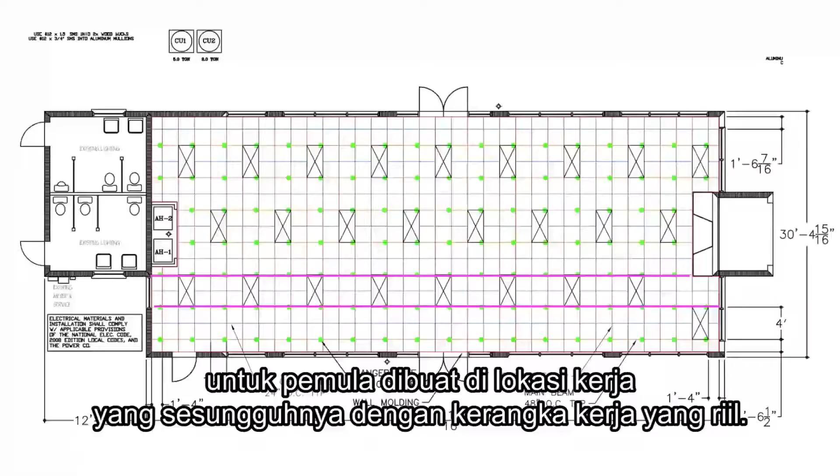Would you like to learn how to install an acoustical ceiling for that next commercial project or even your home's basement? Armstrong's authentic 20-minute ceiling apprentice video was filmed on a real job site with real blueprints. We will review the tools that you need, plus how to determine critical installation layouts. Next, you will learn proper wall angle, hanger wire, and grid installation techniques that will have you hanging like a pro. Your installation will look so good, and no one will ever know you're a 20-minute apprentice.

After that, we will discuss lighting layout considerations, ceiling panel installation techniques, and helpful grid accessories from Armstrong that will make your installation look even that much better.

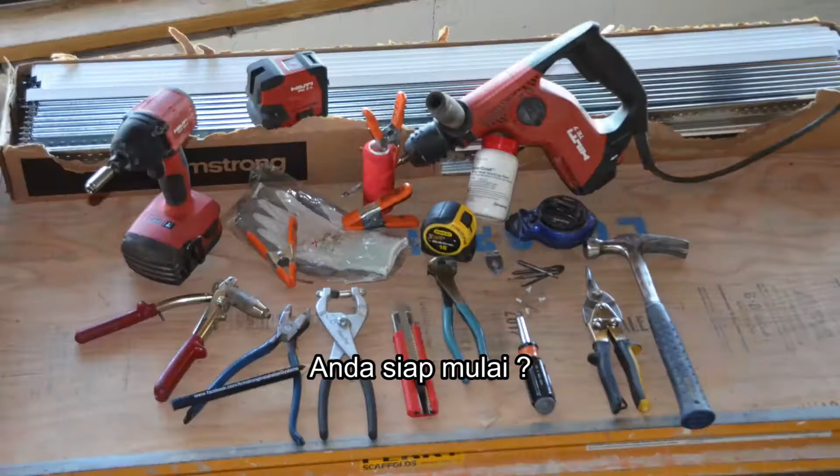Ready to get started? First, you will need some tools. Here are the most common tools that you will need. Pause and screenshot this checklist. You will see these tools identified and put to use throughout this video. Having the right tools and safety equipment will help to ensure a perfect, safe ceiling installation.

Here are the project plans. This was an old open-air camp dining hall that is being enclosed and air-conditioned for more versatile use in the warm Florida climate. Our new ceilings will quiet the space while providing consistent, even lighting throughout.

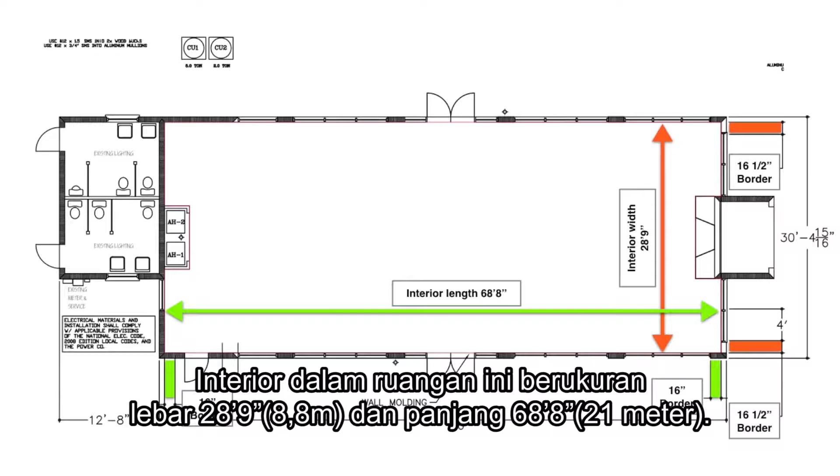The interior width of this room is 28 feet 9 inches, while the interior length of the room is 68 feet 8 inches. This video will show how to center up your ceiling installation within a room for a pleasing, balanced visual. The architect may have grid layout recommendations in their plans, like main runners lined up at center of column, mullions, etc. This is important to check before your installation.

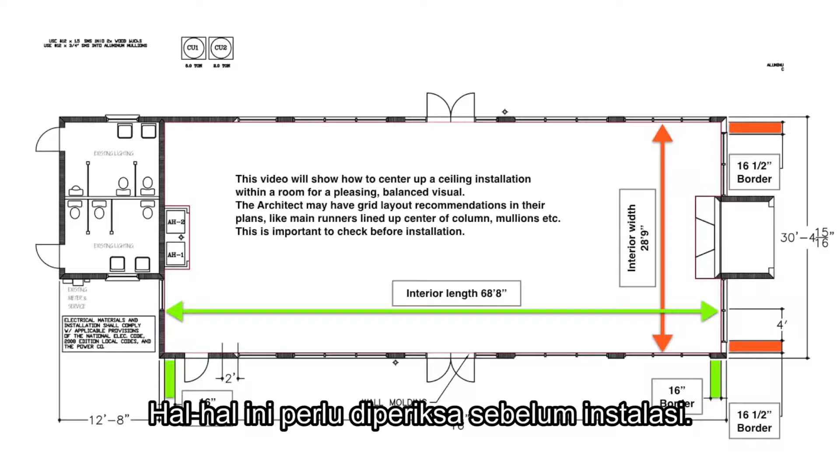A laser is crucial to use when installing today's level ceilings. Luckily, they can be purchased inexpensively from your home center or distributor. Many locations rent lasers as well. Make sure your level line laser is set to the finished height of your ceiling. This is the line that we will hang our wall angle at first.

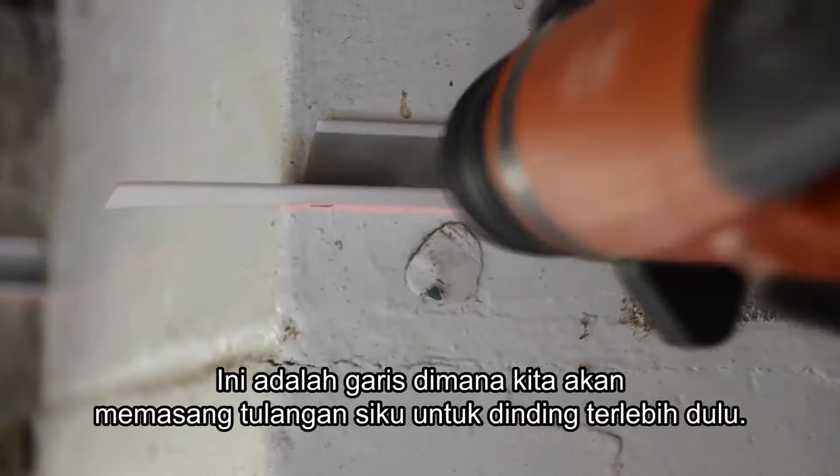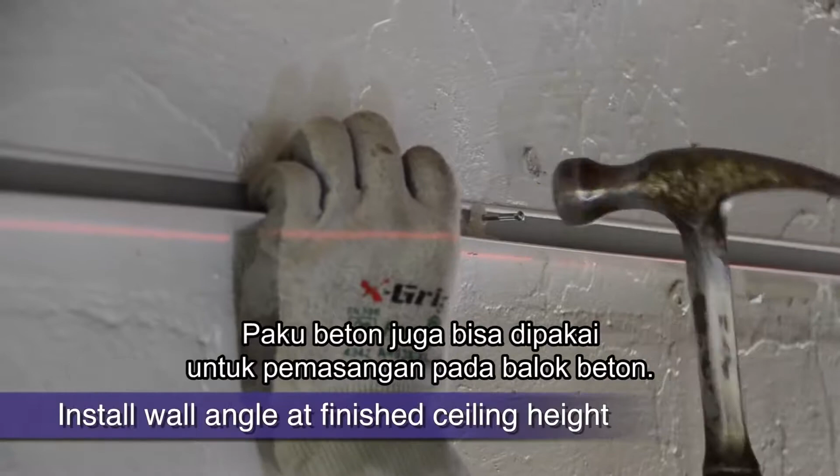As you can see, on this project we must hammer drill holes for tap-in anchors as we hang our wall angle to the red laser line. Hard nails often work as well when attaching to concrete block. Most often, you will only be attaching to drywall. In that case, a screw gun and drywall screws or fence staples and a hammer are all that you will need to attach your wall angle to drywall. Code does not consider acoustical wall angle structural, however, it must be securely attached to the wall for a finished installation.

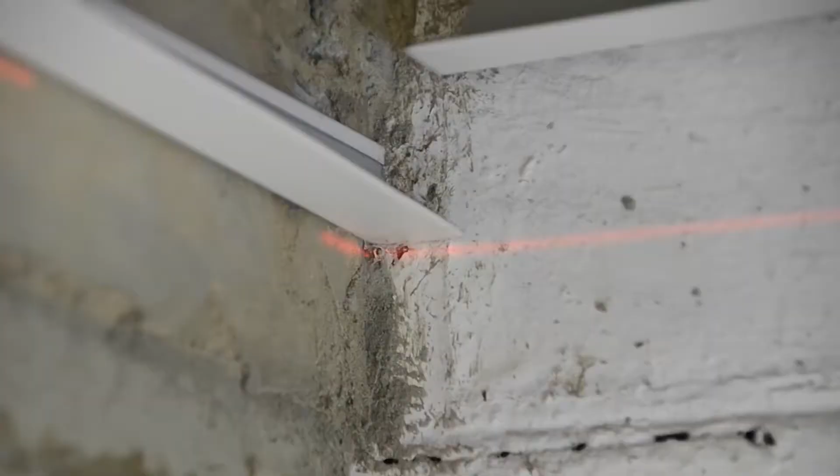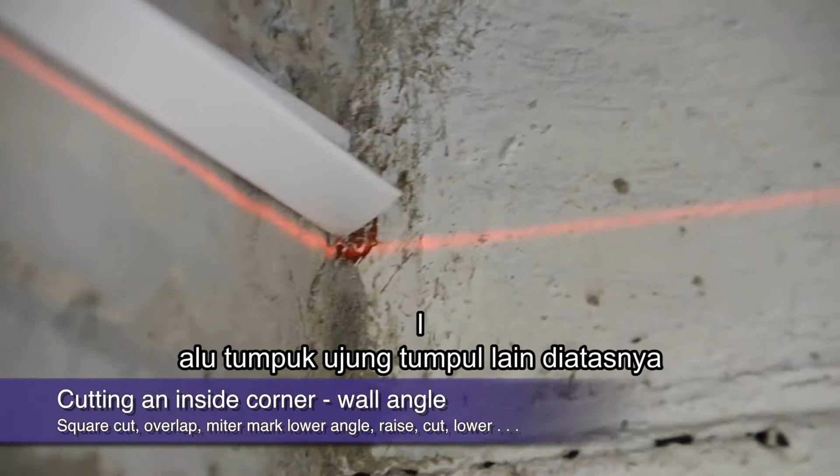When you get to your inside corners, a finished 45-degree miter is a much more pleasing visual than simply overlaying butt cuts. All you have to do is mark and cut a 45-degree on the lower angle, then overlay the butt cut upper angle for a perfect mitered visual from below.

Your outside corners require a little more attention, but are still easy to achieve a clean mitered visual. Simply let the angle override past the corner, then square butt cut to length. Next, you want to cut away the vertical flange, leaving an exposed horizontal tab. You will do this to both angles that approach the outside corner.

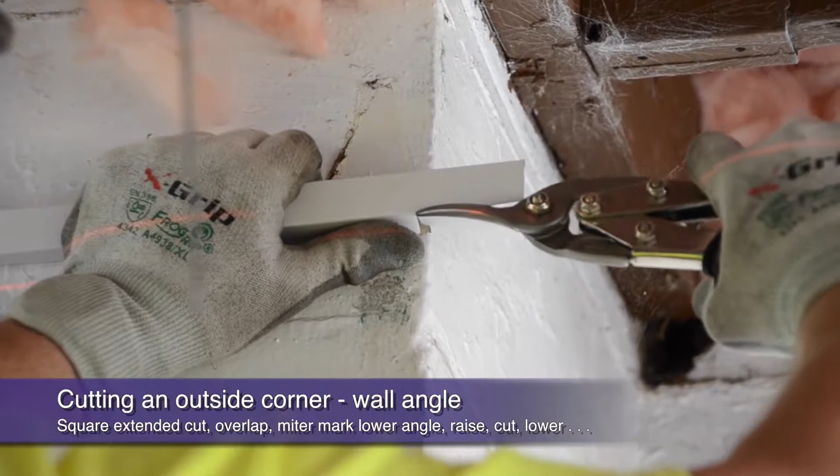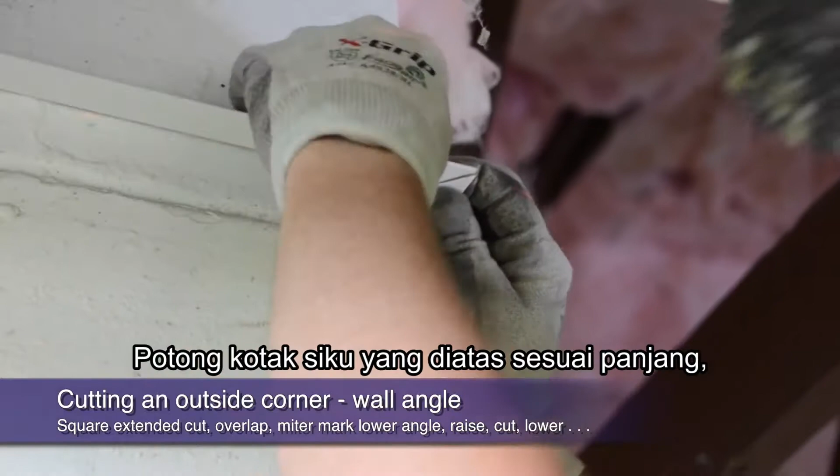After overlaying them at the corner, mark where your 45-degree miter cut will occur on the lower angle. Next, raise your upper angle and make the 45-degree cut on the lower angle only. Square cut your upper angle to length and you're finished with a corner that looks perfectly mitered but is still structurally sound. A spring clamp will hold the corner into place while you do the final attachment to the wall.

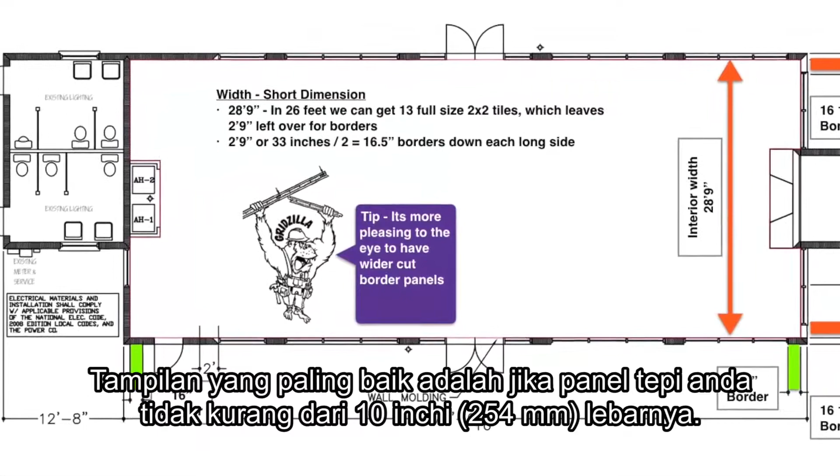Now, let's figure out what width our perimeter border ceiling panels should be. This will help us determine our ultimate grid layout. Since buildings are not usually perfectly square, you know that you're going to have some border cut panels. The most pleasing visual is achieved when your border panels are no less than 10 inches wide and the opposite wall has the exact same size border panel, achieving proper room balance.

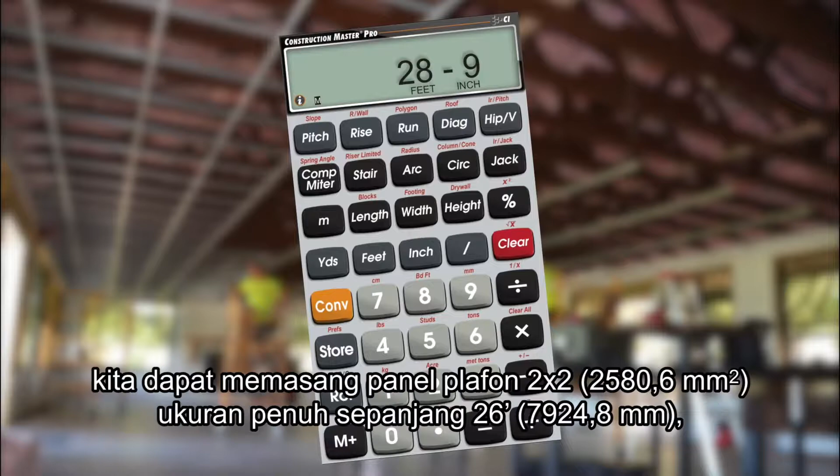We're going to use the handy Construction Master Pro calculator app, but a regular calculator will work as well. If our room is 28 feet 9 inches wide, let's figure on installing 26 feet of full-size 2x2 ceiling panels. That leaves 2 feet 9 inches of panels for our borders, which when divided by 2 leaves us with 1 foot 4.5 inches, or 16.5 inch border panels down each side.

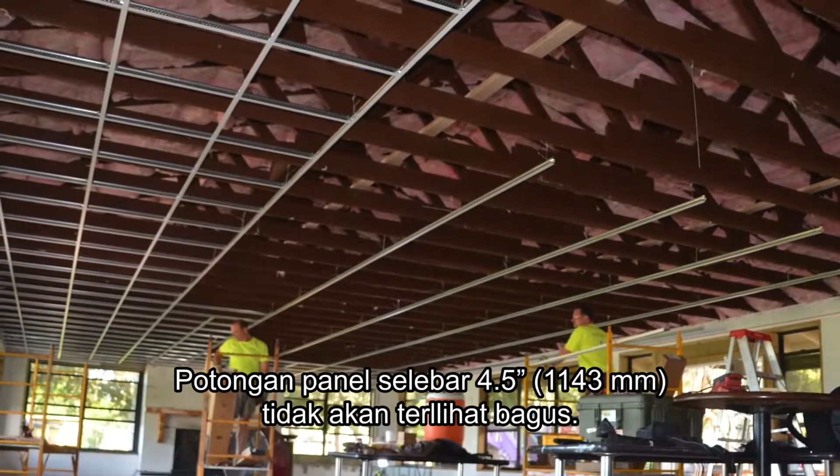Small sliver 4.5 inch border panels would not look good, but these 16.5 inch border panels will look great and achieve proper room balance. Now, let's figure our borders for the remaining 2 sides. If the length of our room is 68 feet 8 inches, let's use 66 of that total for our full-size panels and split the difference between our remaining 2 feet 8 inches.

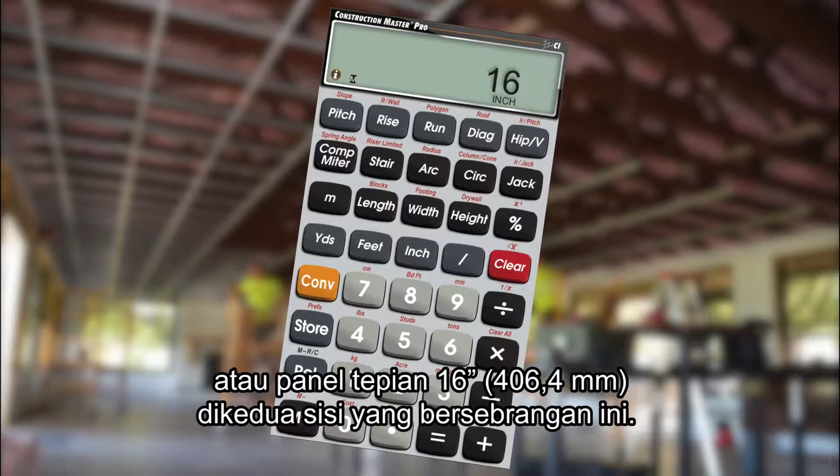Divided by 2, that leaves us 1 foot 4, or 16 inch border panels down these other 2 opposing sides. To ensure that our grid installation is nice and square, it's important to install 2 perpendicular dry line or control line strings to serve as a perfectly square benchmark to install our grid off of.

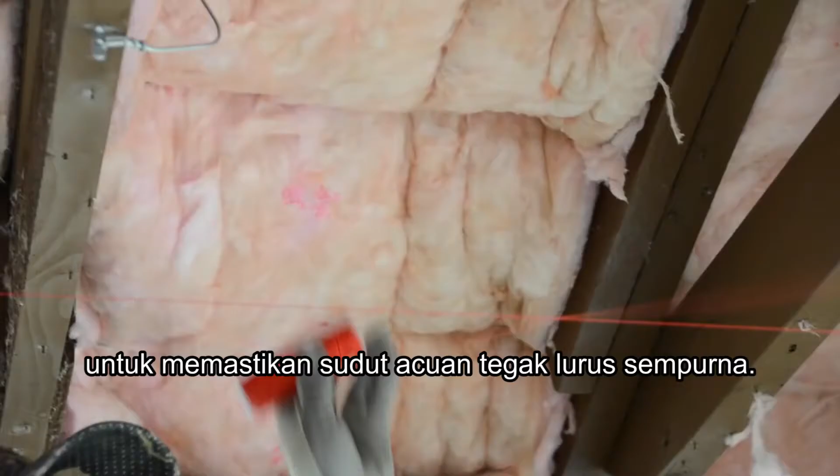We will run our first dry line down the length of the building. We already know that the border panels here will be 16.5 inches. Let's add 24 for the width of a full-size panel. This will be 40.5 inches, and place our dry line dead center, running parallel with our first main runner. We really need that dry line to be just touching the outside edge of this main runner. So after adding a 1/2 inch for a 15/16 inch main runner, this places our dry line at 41 inches

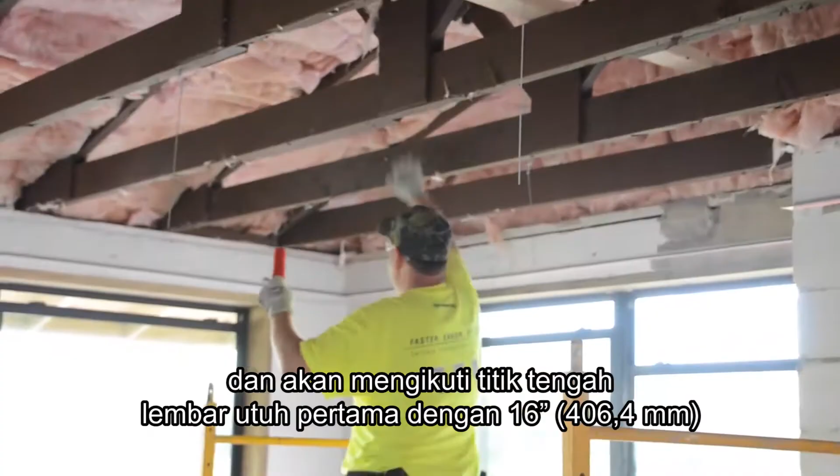off the long wall. The second dry line will run the width or shorter dimension and will line up with the center of the first full-size tile. With 16 inch borders along the short wall, plus half of a full-size 24 inch tile, which is 12 inches, we are left with this dry line located 28 inches off the short wall.

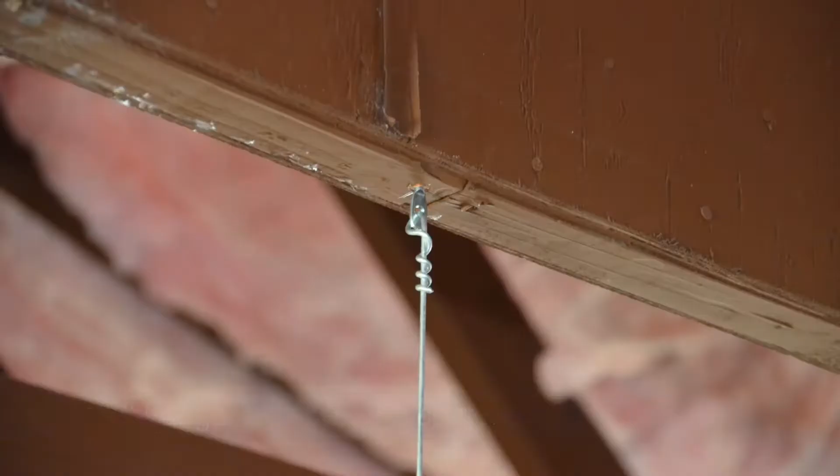Now, with our dry lines up representing our first main runner placement, we are ready to install our 4 foot on center 12 gauge hanger wires. Without the dry lines, it's difficult to know where to install our first run of hanger wires. Here, we are tying wires to the eye-lag screws, but you may be shooting wires with a Hilti gun into concrete deck. After your first run of wires, simply move over 4 feet and install your second run, and so forth.

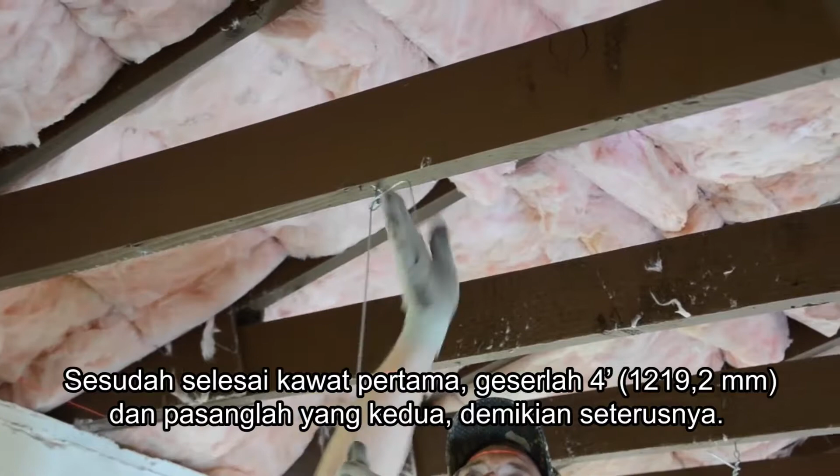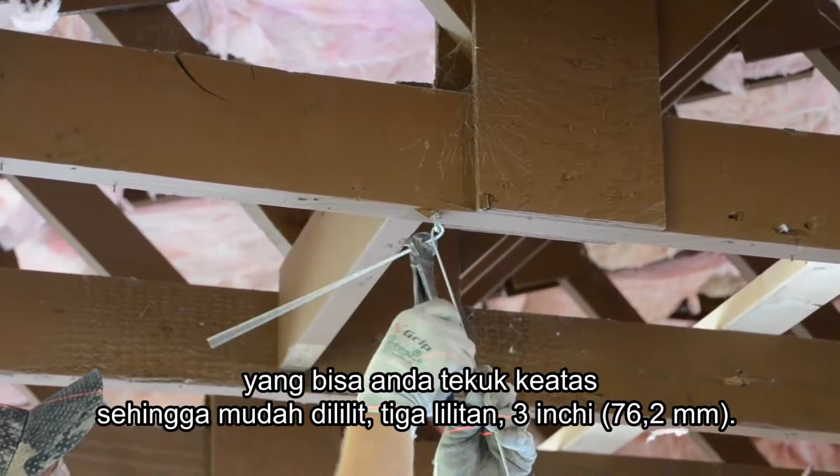Tying wires is easy, provided you leave a long tail that you can bend up into a handle for easy wrapping, 3 wraps in 3 inches. Use of wire cutters can also aid in tying as well, as shown here. Again, you want to get at least 3 full wire wraps within 3 inches to meet code.

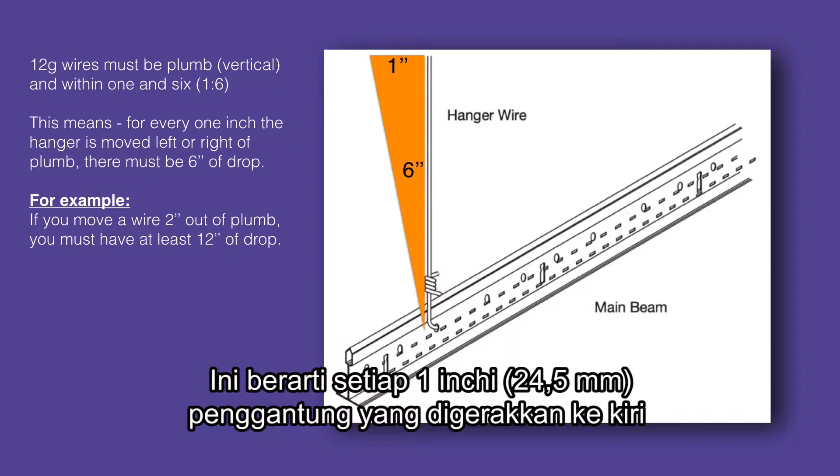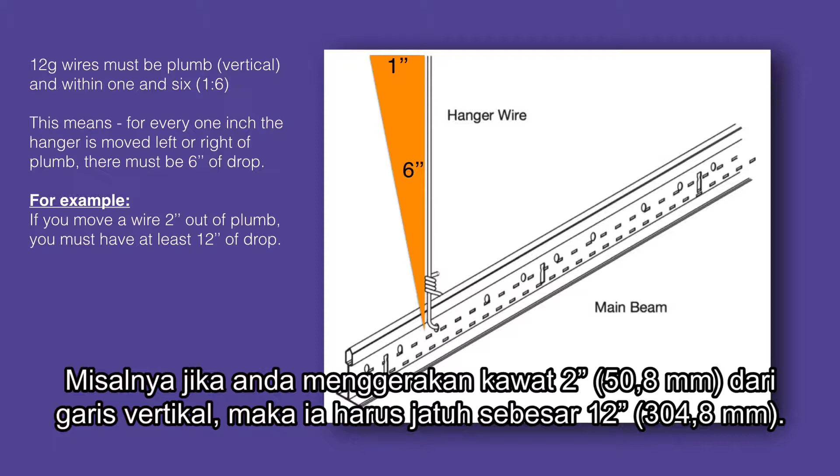It's important that your wires drop plumb or vertical. They should always be within 1:6 of plumb. This means that for every inch a wire is moved to the right or left of plumb, there should be at least 6 inches of vertical wire drop. For example, if you move a wire 2 inches out of plumb, you must have at least 12 inches of vertical drop. If it is not possible to achieve a 1:6 wire drop, then you must countersplay an additional equally sloped wire in the opposing direction to maintain symmetry.

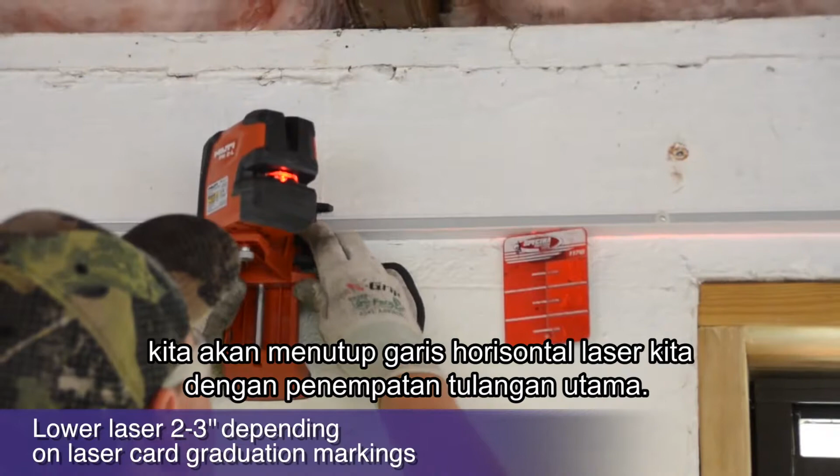As we install our main runners level with the wall angle, we will ultimately block our laser's horizontal line with the main runner's placement. That's easy to fix. Just lower your laser 2 to 3 inches and level by attaching your magnetic reflector card to the bottom of your grid as you install and level it.

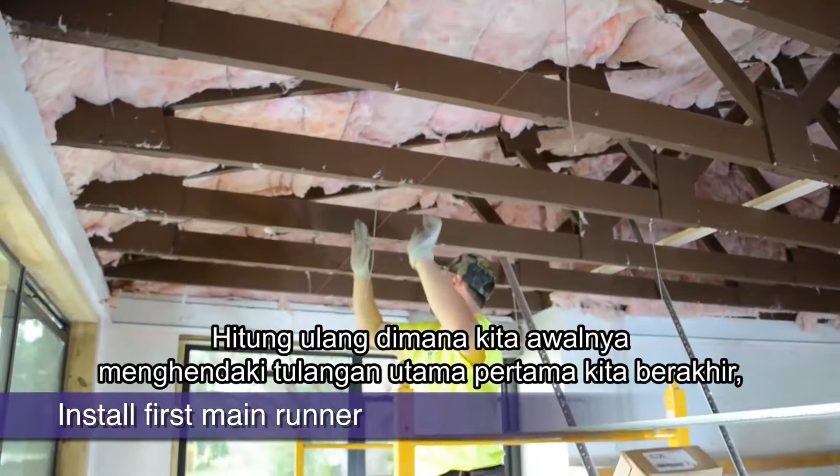Our first main runner will install parallel to the first long dry line, keeping the dry line on the outside edge of the main. It's always important to have a wire in close proximity to the end of a main runner. Counting back from where we want our first main runner to end, it will be 8 feet plus 1 foot for a total of 9 feet back to the dry line intersection.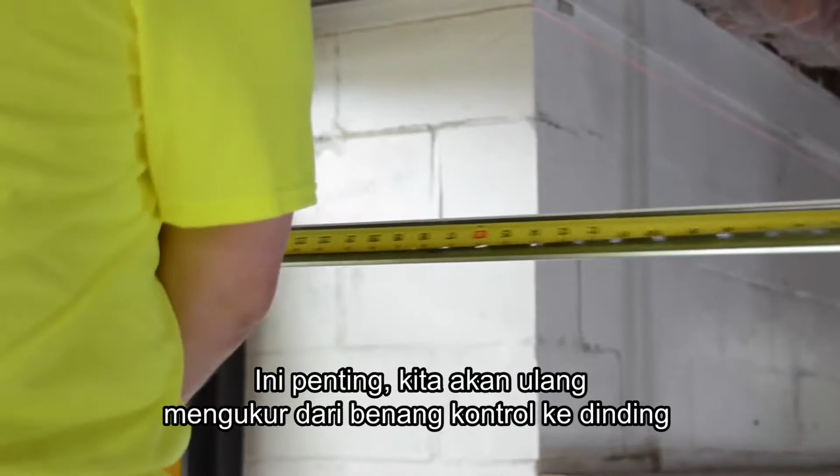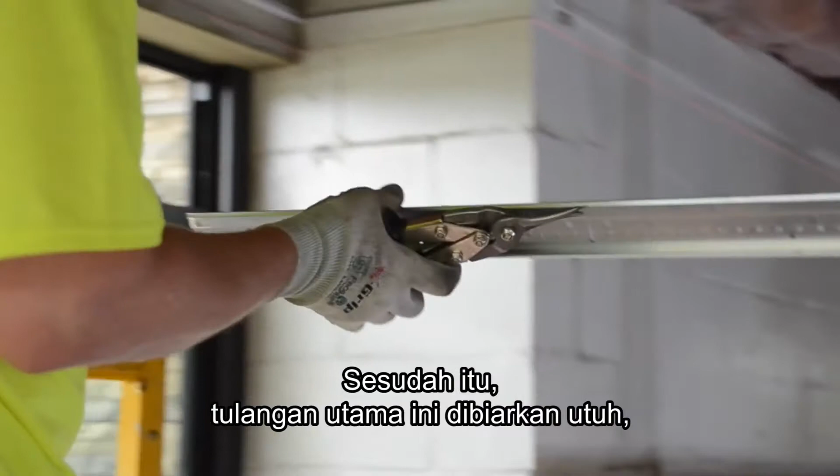This is important. We will repeat measuring from the dry line to the wall for each 4 foot on center starting main runner that we install. After that, mains will continue on as full-size main runners that always end within 3 inches of a hanger wire location.

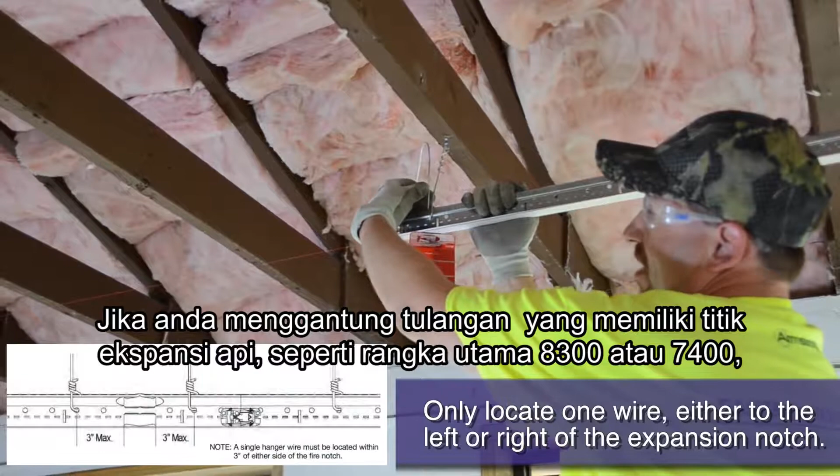Notice here how our perfectly measured main runner has a hanger wire hole within 3 inches of the main beam splice. If you are hanging mains that have a fire expansion notch, like 8300 or 7400 mains, you must add an additional wire within 3 inches of either side of the expansion notch.

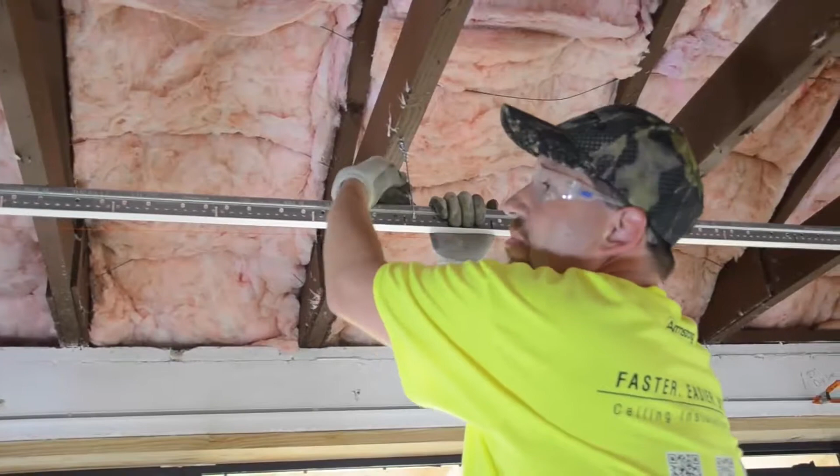Notice how the grid is being leveled to the laser card every time a wire is attached. Again, remember to measure back from the dry line and cut your other starting main runners like you did the first one. Each starting main runner should have the same cross T rout hole passing directly over the short dimension dry line. Without this preparation, your cross T's would never visually line up straight.

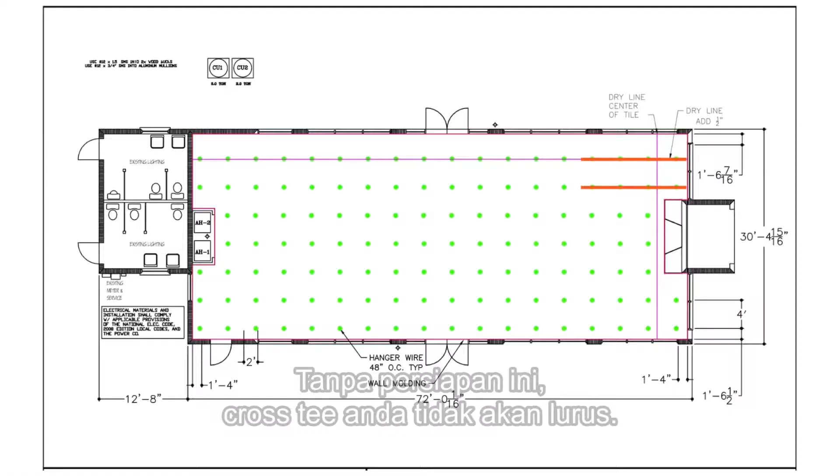Let's install the 4-foot cross T's with the first T spaced 16 inches off of our parallel starting wall. All other 4-foot cross T's are then 24 inches on center. Once you hear the positive click, you know that the T has engaged the rout hole.

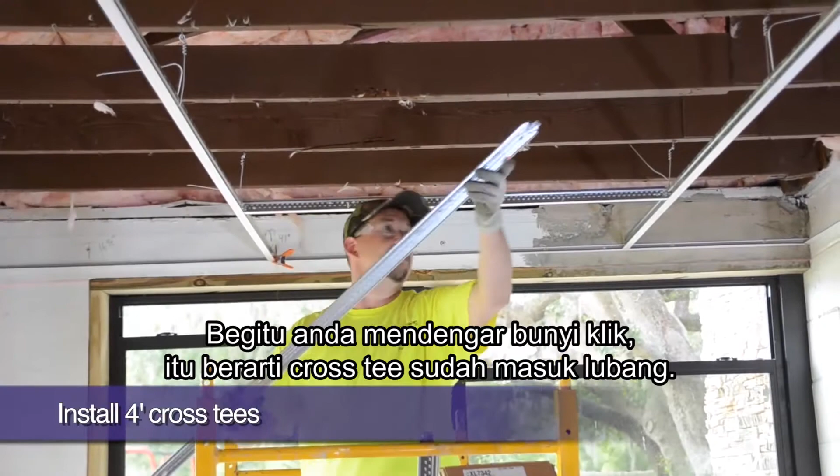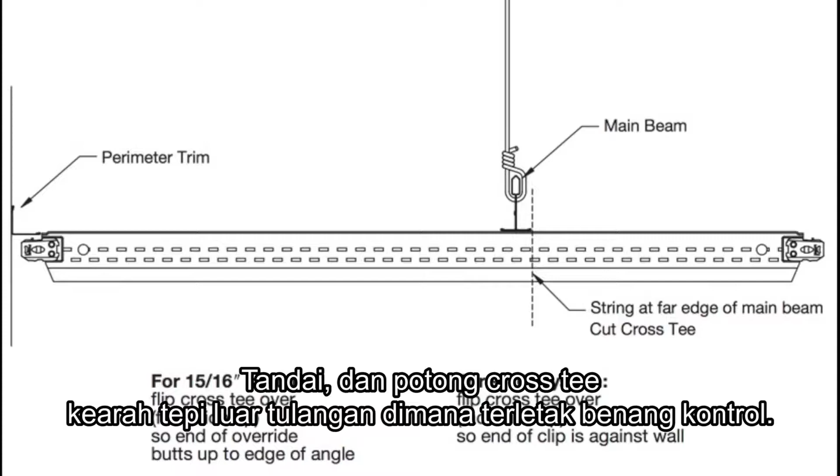When it's time to cut a 4-foot cross T that runs perpendicular into the long wall, butt the white flange of the T to the outside edge of the wall angle, then mark and cut the cross T to the outside edge of the parallel main runner, where the dry line is also located. Next, simply spin the T 180 degrees and install it. It will be perfectly cut to size.

5 to 7 spring clamps are a must for every installer. These clamps are your extra set of hands to hold the T's in place until you are ready to permanently secure with a pop rivet.

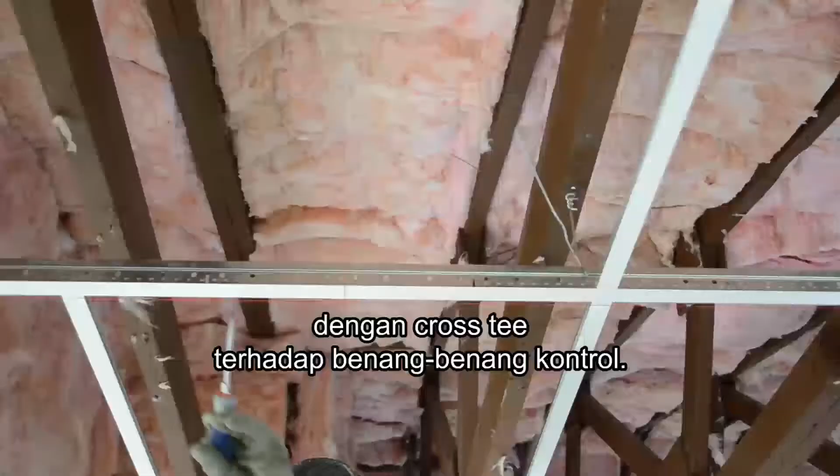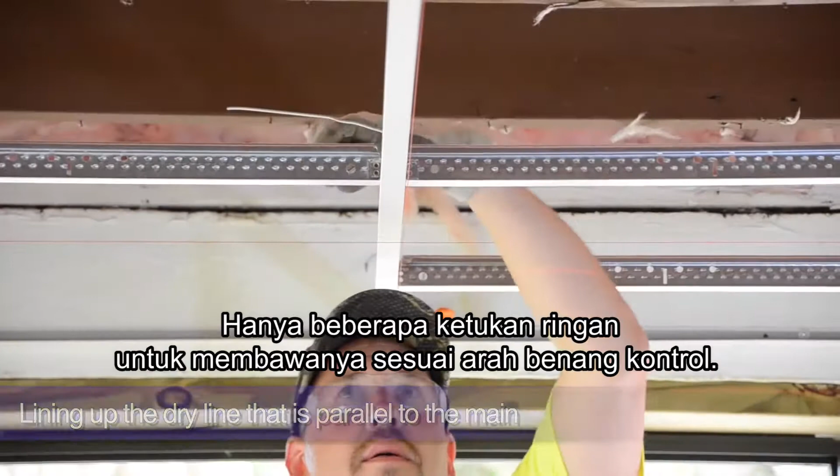We are at the point now where we need to square our 2 starting main runners and their cross T's to our dry lines. This is the short line. Notice how light taps adjust the rout hole directly over the dry line. Same thing goes for the main runner. Just a few light taps to bring it alongside the dry line. Our spring clamps give just the right amount of tension to let our border T's move when tapped for adjustment to the dry line.

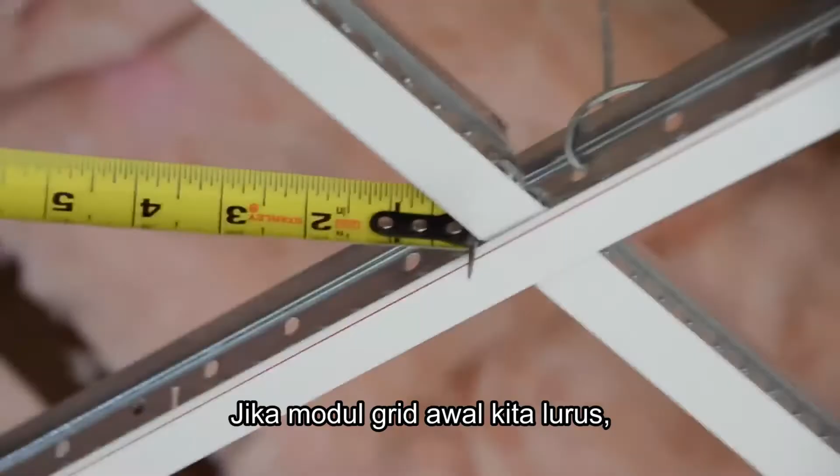After we are certain that our grid is square to both dry lines, cross-diagonally measure a 4x4 grid module. Even if all 4-foot cross T's are installed, measure a 4x4 module. If our starting grid module is square, both diagonal measurements should be exactly the same. If they are not, push your module's 4-foot T's to the right and clamp to remove slack and remeasure. If you are still out, adjust your short dry line and remeasure until you are square.

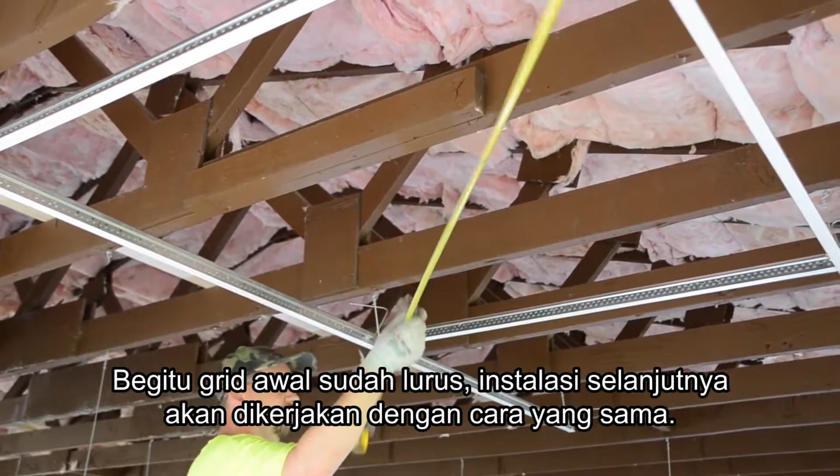It is so crucially important to achieve perfect squareness at this starting corner of the room. Once this starting grid is square, the rest of your installation will continue on this way. Now that you are square, let's permanently keep it that way by pop riveting our grid to the wall angle on these 2 perpendicular starting walls.

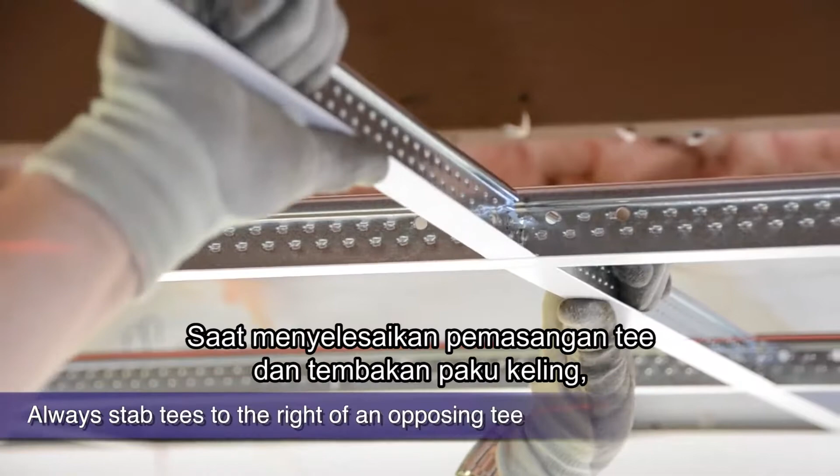You may still have some cross T's to install, so do this now. When stabbing a cross T into the rout hole, always stab to the right of an opposing cross T. While finishing your T's and your pop rivets, constantly readjust to the dry line if needed, because when you're finished with this starting corner and it's square, the rest of your job is virtually guaranteed to be square. Do the harder detail work in the beginning corner to guarantee the rest of the installation continues on smoothly.

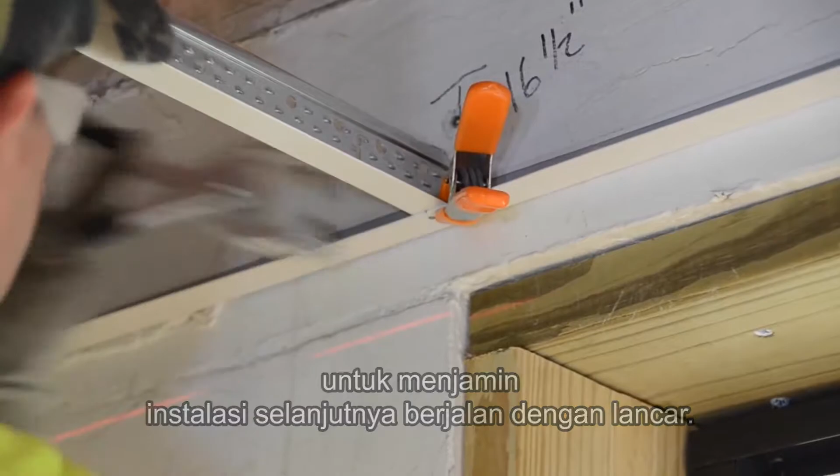If you are not allowed to show exposed pop rivets, or you have 9/16 inch narrow profile grid on your project, consider the GCWA or Grip Clip Wall Attachment Clip. When tapped into place behind the wall angle, the GCWA has teeth that bite into the grid after squeezed with pliers, or screw holes for screw attachment. Either way, you're locked and secure.

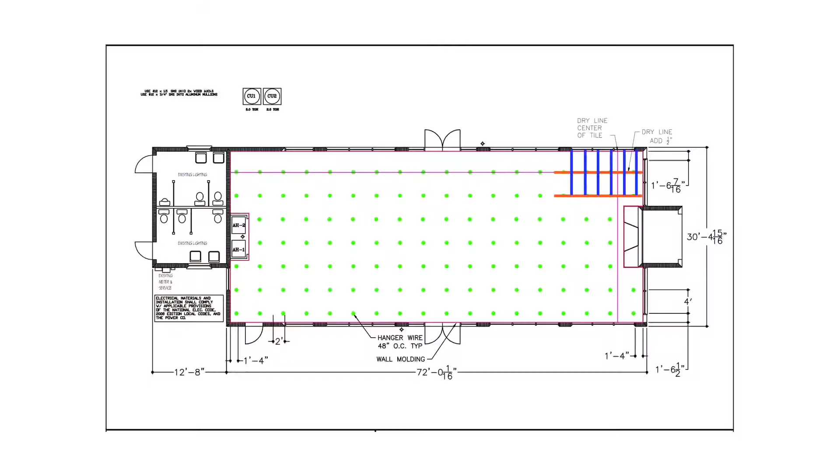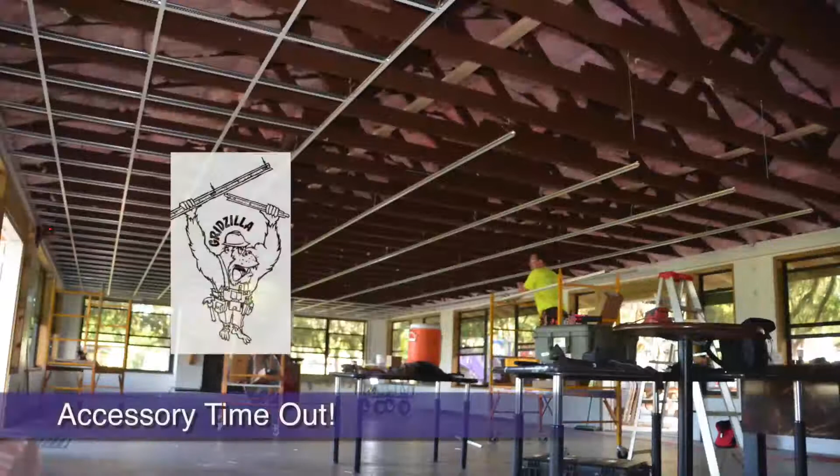Now that our starting corner is complete, let's finish tying any remaining wires and move on. It's always best to wait and finish your final wire ties until the end, just in case there's any final leveling needed. Since we're talking wires here, this little accessory is a great one to have as well. If you need to splice new wires into older existing wires, like on a renovation project, or you simply need to fabricate a 20-foot wire, the WS12 is the way to go.

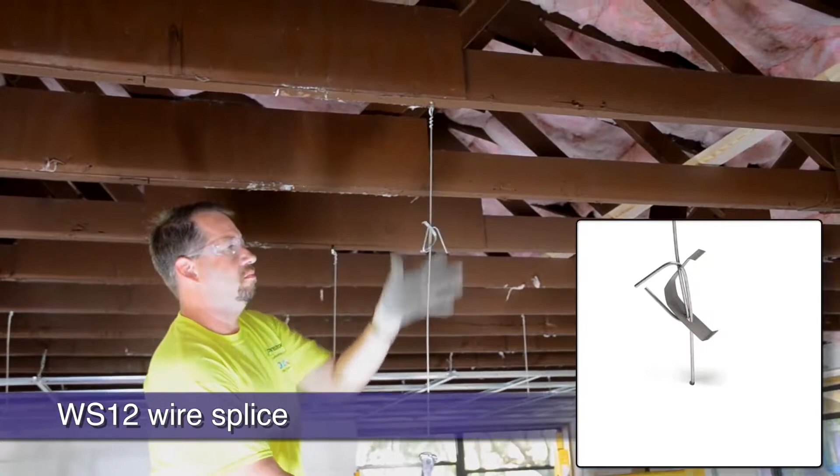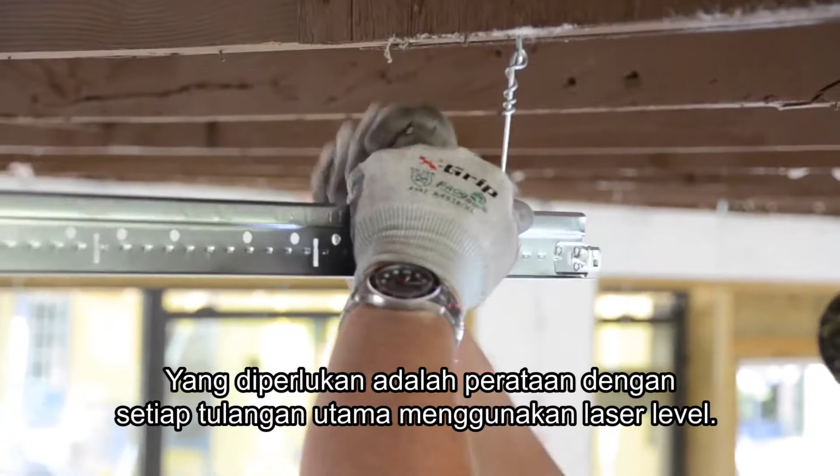Our next main runners are now going up along with 4-foot and 2-foot cross tees. All that's needed is some leveling to each main with our laser level. We can be assured that our installation is square though, because we took the time in the beginning to start the project off with a square installation. You'll want to keep your dry lines up and refer to them from time to time. However, the squareness should carry on.

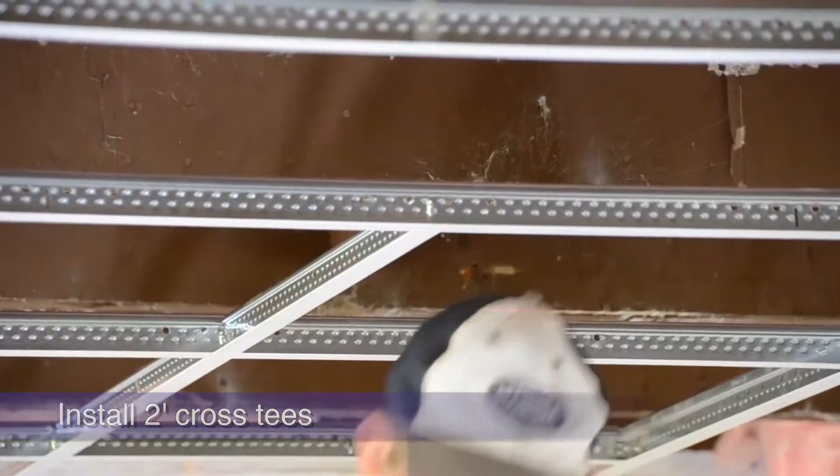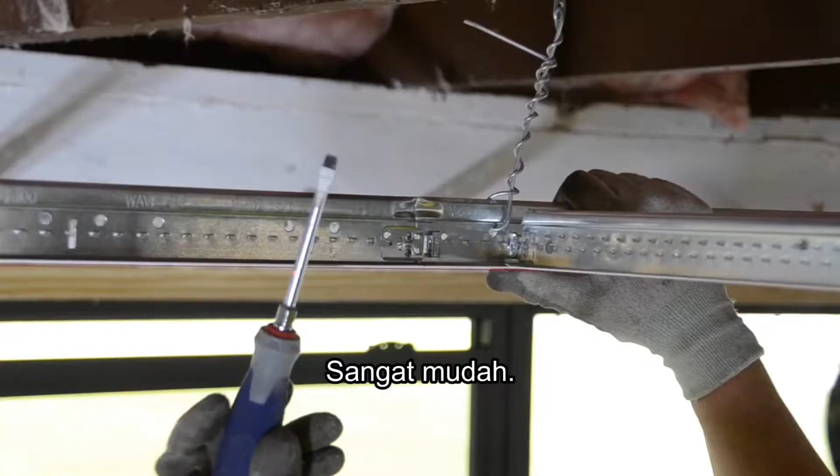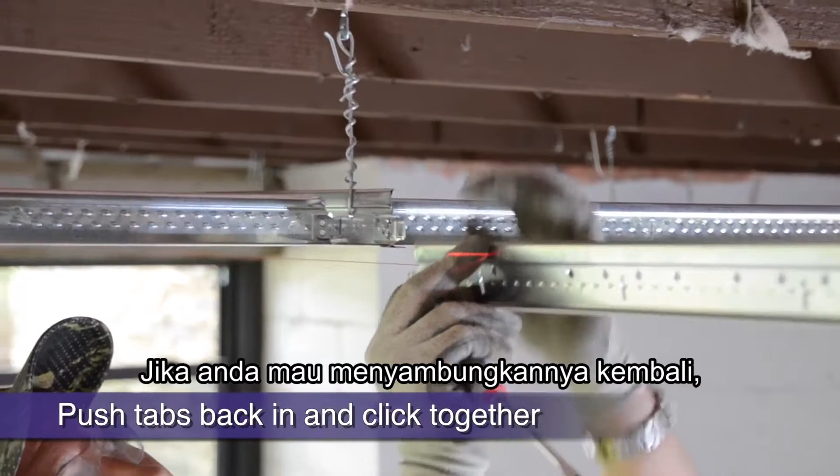When it comes time to splice two 12-foot main runners end to end, simply stab to the right of the opposing main runner. When you hear a click, your connection is tight and locked with over 300 pounds of pull-out resistance. How do you take main runners apart? It's real easy. Just grab the slotted screwdriver and bend your pocket tabs on either side of the main out 90 degrees. When you are ready to splice them back together, simply bend the tabs back into place and stab them together again for the same tight connection as before.

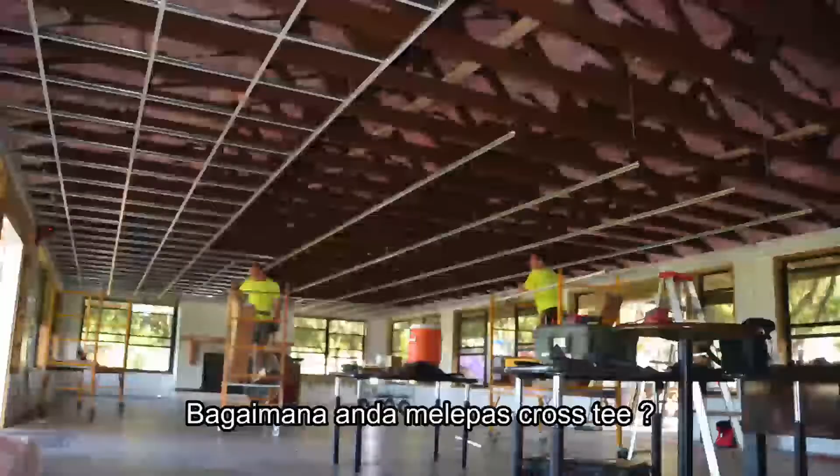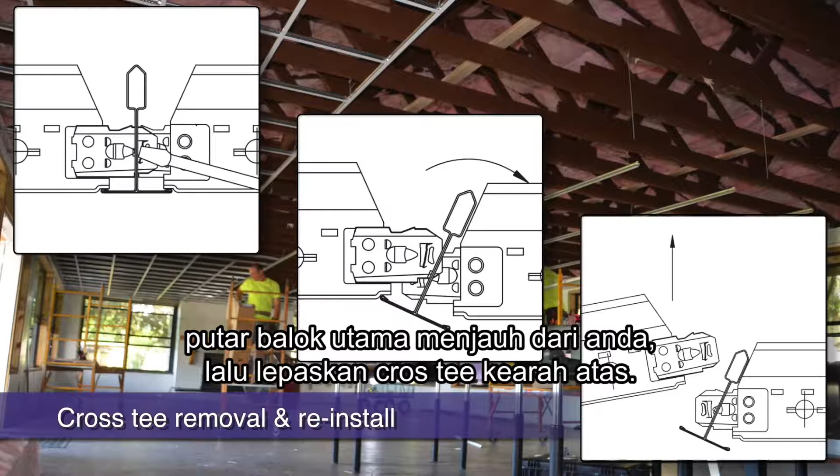Our grid installation is really starting to take shape, with mains and tees expanding exponentially in two directions. We talked about the strength of the main splice and its removability, but what about the cross tees? Well, once engaged T to T, it will take 300 pounds to pull them apart. How do you disengage cross tees? With a flathead screwdriver, depress the cross tees' outward locking tabs on both sides of an intersection. With two hands, rotate the main beam away from you. Then, disengage the cross tee you are trying to remove upward.

Here's a real-life example. Here we are pushing the locking tabs on both sides. Now comes the rotation of the main runner. Before reinstalling, just bend the locking tab back out at a 45-degree angle.

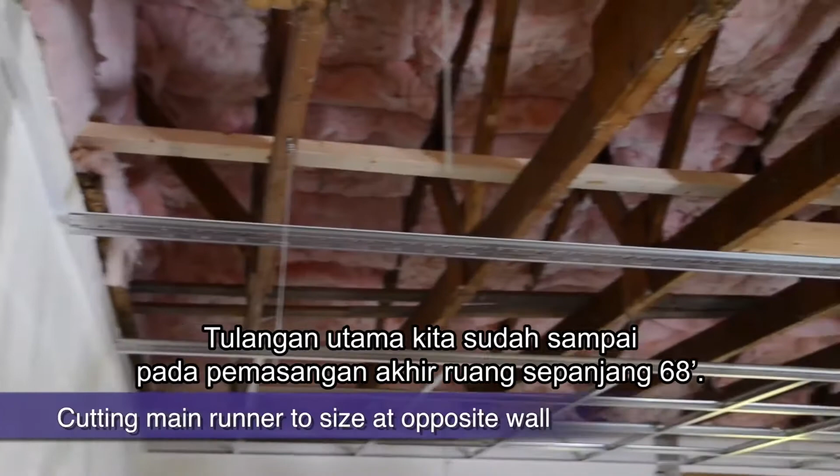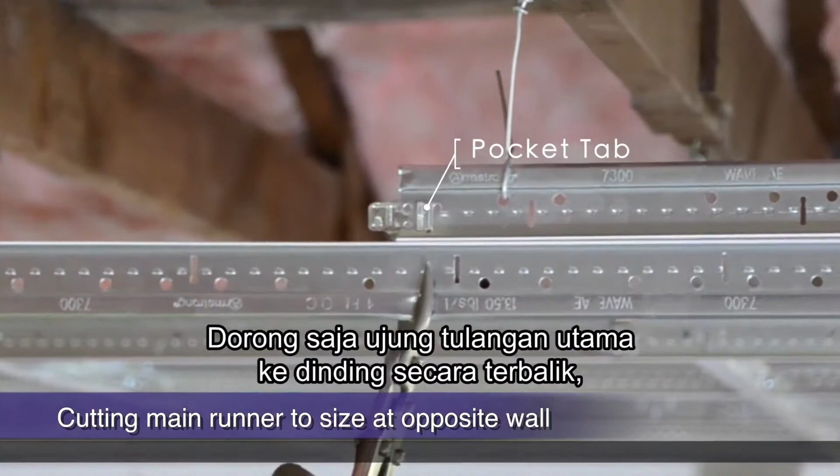Our main runners have come to the end of our 68-foot building run. How do we accurately cut a main runner to size at the opposing wall? Just butt the end of the main to the wall upside down. Then cut back as far as the pocket tab on the main runner above you. Next, rotate your cut main 180 degrees and reinstall.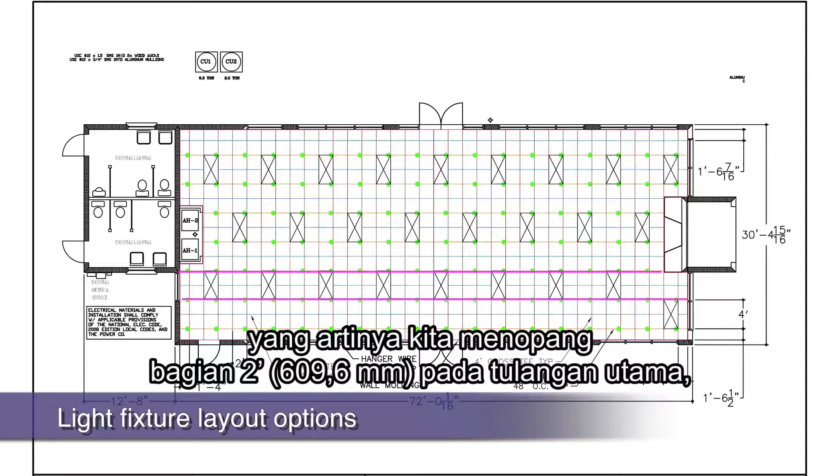Okay, we've reviewed dry line and hanger wire installation, then main runner installation, followed by 4-foot and 2-foot cross tee installation. Let's talk about light fixture layouts. The architectural plans had our 2x4 lights running north and south on the plans, which means we were supporting the 2-foot ends of the fixtures on the main runners, which is as it should be.

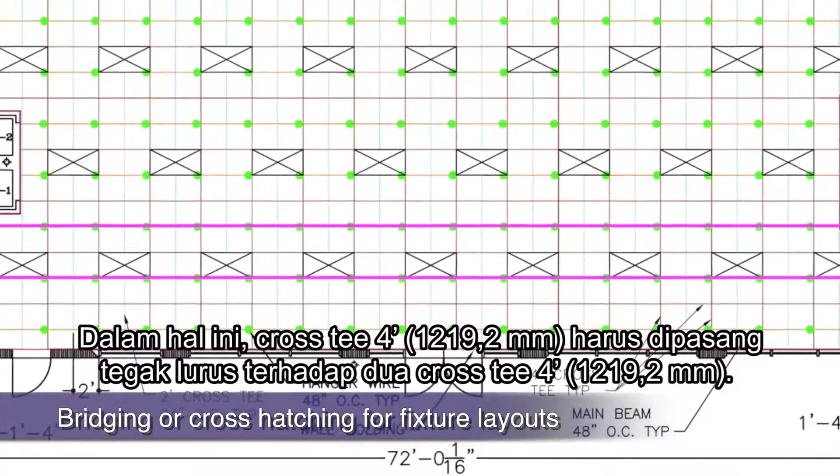What if light fixture direction changes within a room after the grid has been installed? This would only place one side of the light fixture on a main instead of the required two sides. In this case, a 4-foot cross tee must bridge perpendicularly the other two 4-foot cross tees. These bridging cross tees must now act as main runners and have the same carrying capability as the main runner.

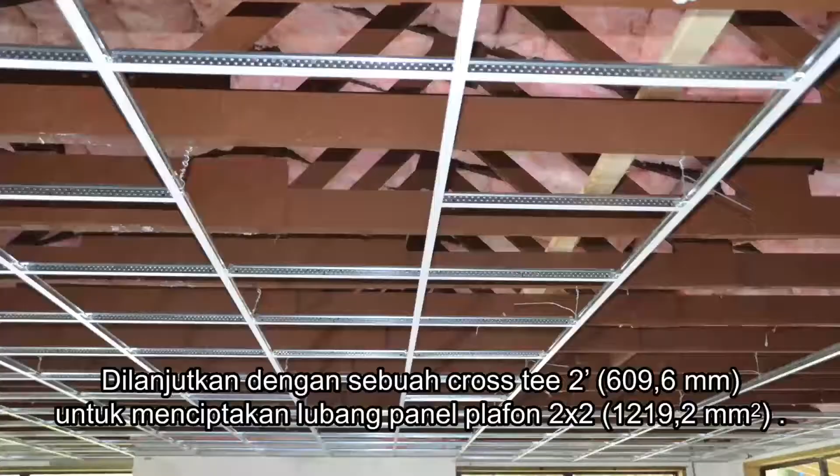Refer to your grid's data page to determine which 4-foot cross tee matches your main runner's load carrying capacity for bridge tee installations. Here we are installing a 4-foot cross tee to create our 4-foot module. This 4-foot bridging tee must match the other two perpendicular 4-foot tees in main beam carrying capacity. We are followed by a single 2-foot cross tee to create our 2x2 ceiling panel openings. Here you see the wire-supported main on the left and the bridging tee on the right.

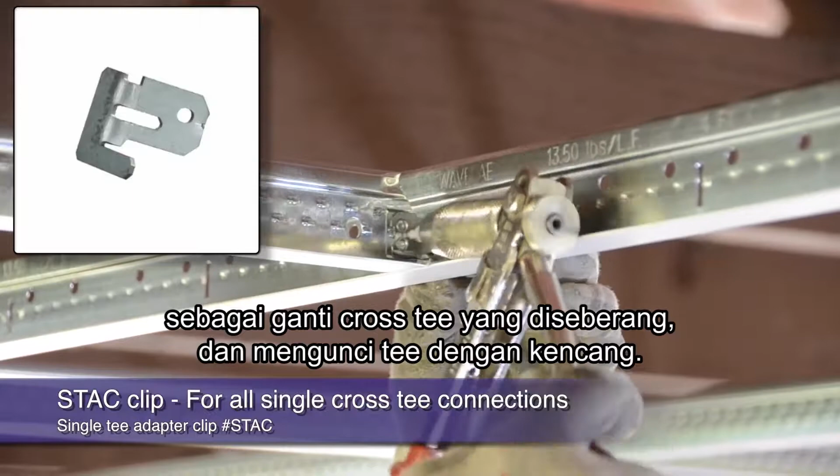Let's talk about staggered or off-module grid installations. When installing a light fixture with unopposed cross tees, or the newly popular staggered module installations, you need to lock unopposed tees into place. For this, use the STAC clip, which takes the place of an opposing cross tee while securing the single tee tight in the module. A pop rivet holds the module and tee tight in even seismic areas.

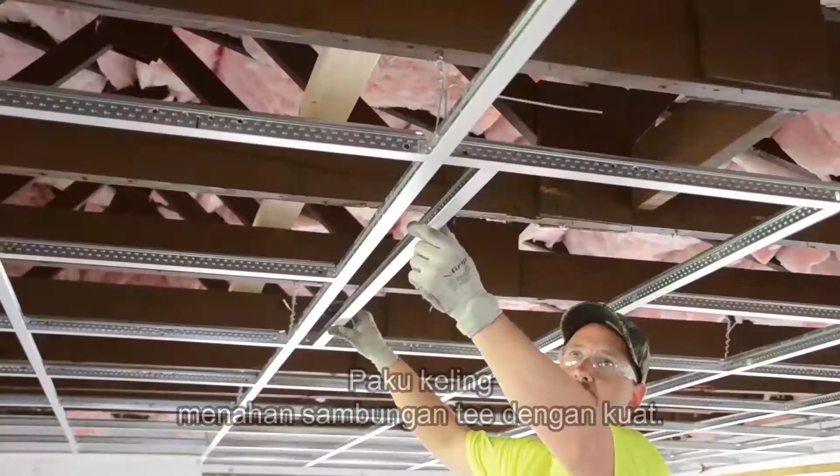If you're having to install custom-sized tees or modules where a cross tee route hole does not exist, cut the tabs off your tee or use a scrap piece of main runner and rest it up in the module where you need it to be. After clamping in place, use a GC3W or grip clip 3-way. This handy clip allows placement of a fabricated tee where a cross tee route hole does not exist. It can either be secured by activating the locking barbs with pliers or screws in a screw gun. Either way, your job fabricated tee is secure and ready to receive a light fixture or air diffuser.

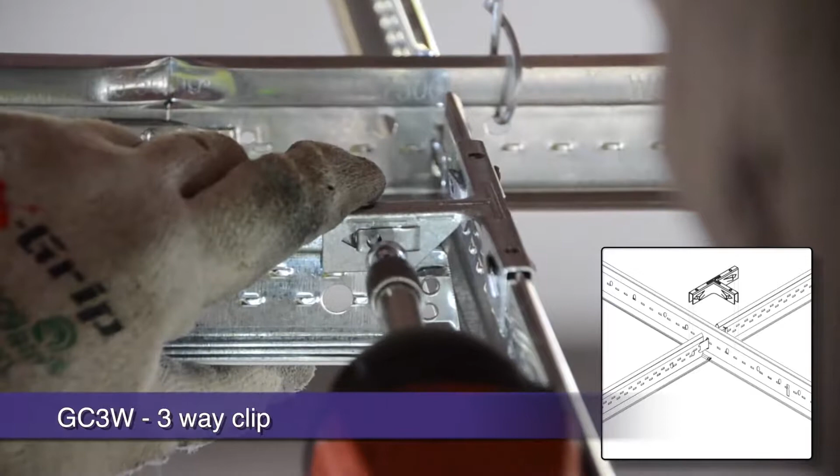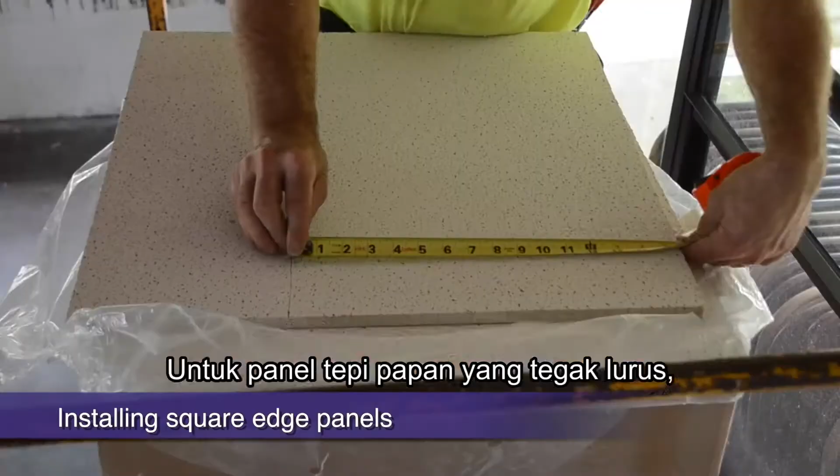Well, our grid is up, square, and finished. Let's spend a few minutes on ceilings, specifically cutting border panels. For a square edge border panel, butt your tape to the wall and measure to the inside edge of the grid for your measurement. Dragging the end of your tape along the face of the panel is a great way to transfer your measurement before cutting. It should take 2 to 3 cuts with a utility knife to make it through your panel.

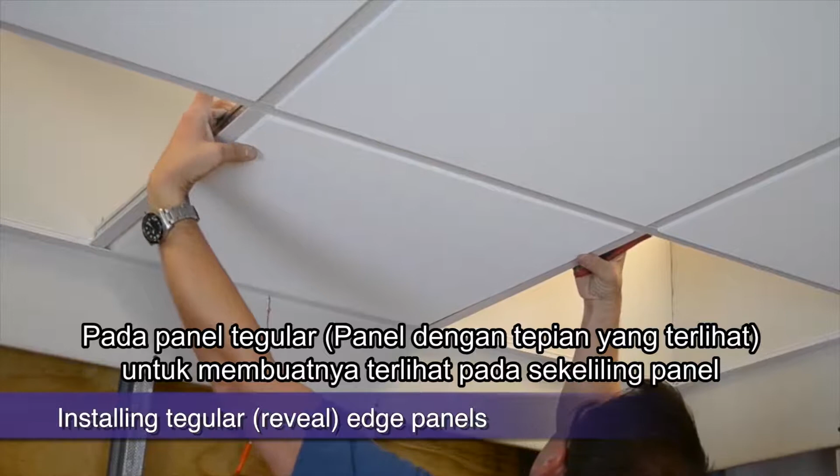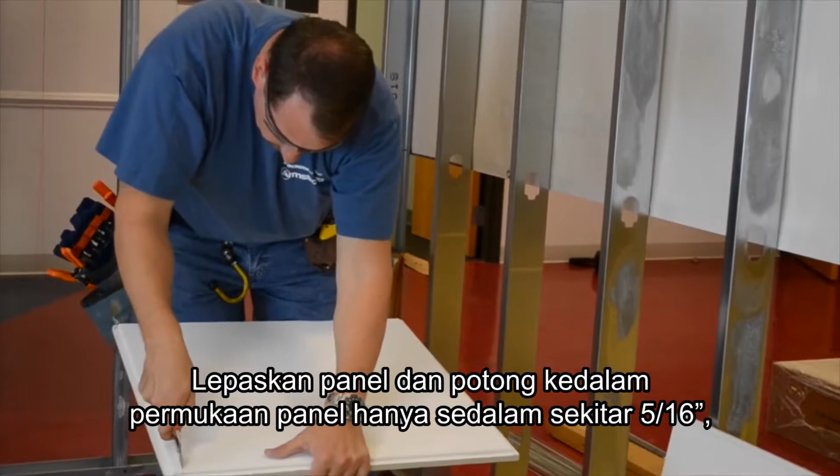For a tegular panel, replicating that tegular reveal at the perimeter is easy once your panel has been cut to the proper length. Just drag your knife along the panel using the wall angle as a guide. Remove the panel and cut down through the face just the depth of the reveal, about 5/16 of an inch. Next, back cut along the edge the same depth to remove that corner piece. Then reinstall and see your perfect custom cut reveal.

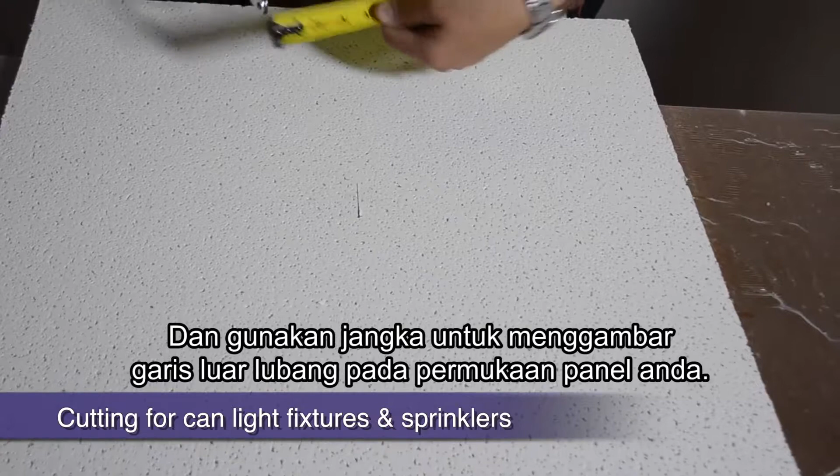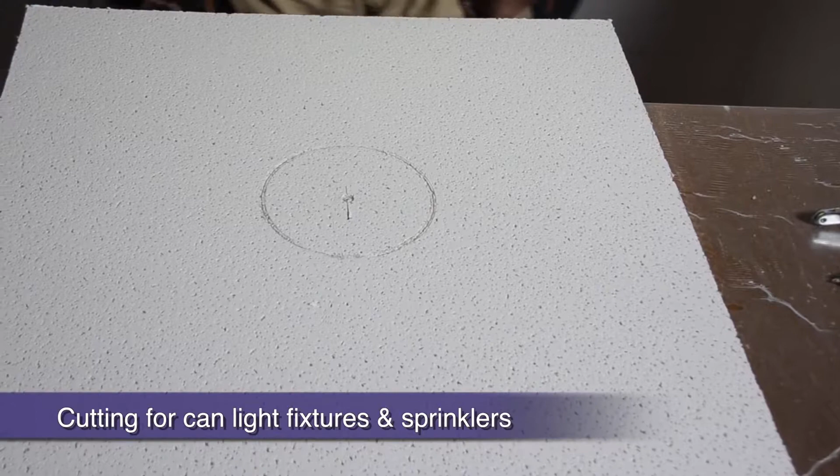If you have to cut circular cutouts for can lights or sprinkler heads, with a tape, mark the center of your cut location. Next, use a compass to scribe and outline your circular cut on the face of your panel. Using a keyhole saw, cut out your circle and you're ready for your fixture.

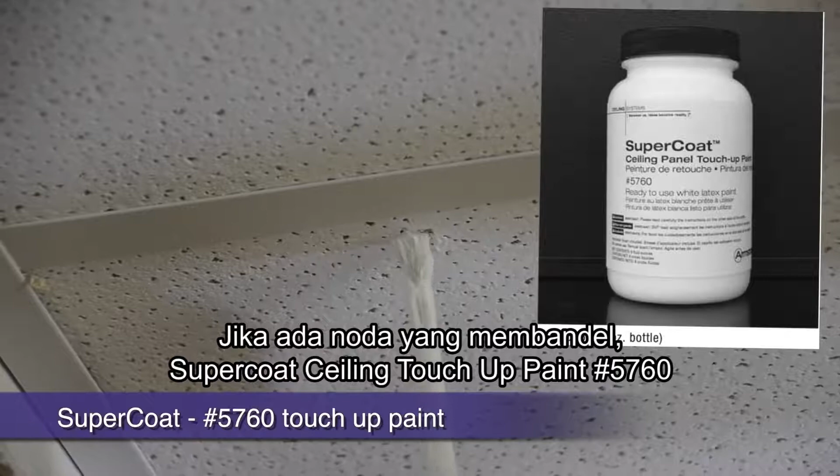Finally, upon completion, if you notice any paw prints left over from installing, a dry chemical eraser does a great job erasing those little smudges from the face of your panels. If you have a blemish that's a little bit more severe, Supercoat Ceiling Touch-Up Paint is available from your local distributor for touching up those deeper gouges, etc.